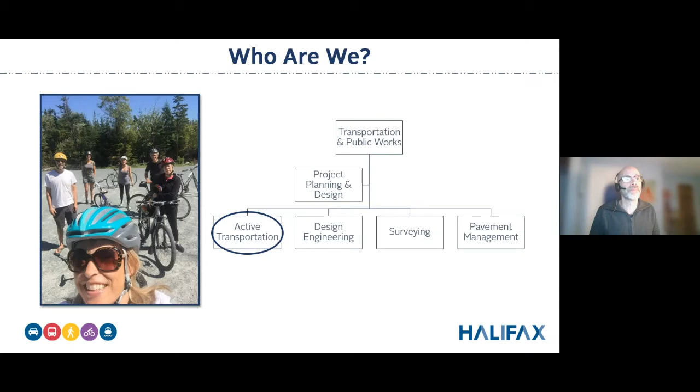This is a question we could do the whole presentation tonight on, why active transportation is important. I would say that if you look at our active transportation plan and the integrated mobility plan, the municipality is working in lots of different ways to make it easier, safer, and more comfortable for people to walk and bicycle.

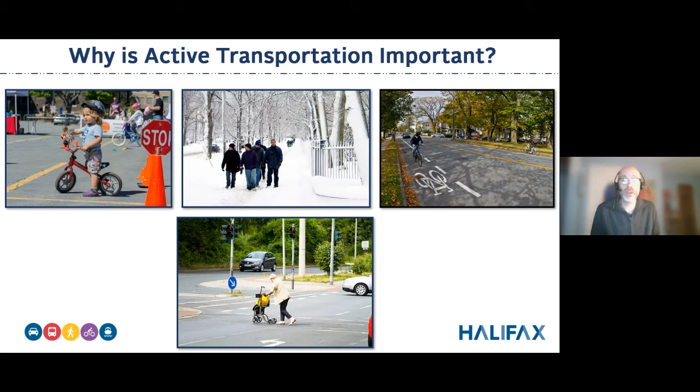That's connected to our objectives around accessibility, around providing transportation options that are accessible to a wide range of people. So if you choose or would like to walk, or you choose or prefer to bicycle, take transit, or drive, we are providing options that are as accessible, as reliable, and as safe, regardless of how you choose to get around. It's also connected to our objectives to reduce greenhouse gas emissions, and lots of different reasons.

I think if you look at how transportation has happened in North America, especially over the past say 40, 50, 60 years, you can't really argue with the fact that it's been focused on moving people in cars.

Halifax, like a lot of other municipalities, is now focusing on making it possible for people to choose options that are more sustainable, take up less space on the road, and are more accessible from an income perspective and from your physical abilities. So that's where we're heading. It's a transition, it's not happening overnight, but there's lots of different ways that we're making progress, and that's certainly the direction we're heading.

This presentation will be a little bit about some of the things we're doing for bicycling. This slide gives you a sense of where we've been and where lots of other cities have been in terms of bicycling infrastructure, and where we're going.

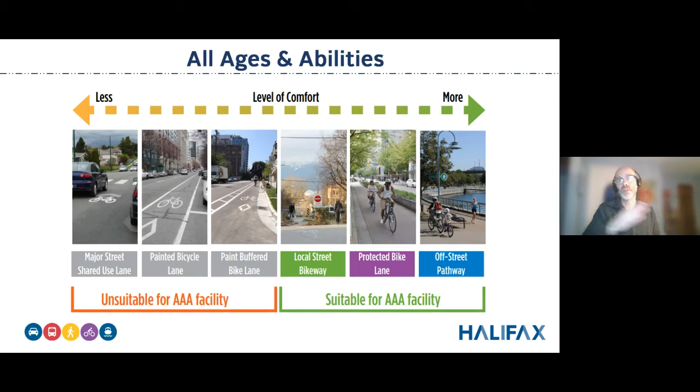Halifax and the IMP made a commitment for implementing all ages and abilities bicycling facilities. These are facilities that if you don't bicycle now regularly, you should feel safe inside of - you should feel buffered from motor vehicles, and there should be accommodation for better intersection treatments.

On the left you have things like pavement markings, which designate where bicycles should be, and maybe visual indicators to motorists to expect bikes there, but there's obviously no physical separation. So there's no room for error - it requires everybody to be watching what's happening on the road. What we know is that's not the kind of facility that if you're not comfortable cycling now, you're really encouraged to use. So less of that kind of thing.

Painted bike lanes - we still have lots of painted bike lanes, and we did build about 70 kilometers, I think, right now of painted bike lanes in the municipality. But again, that's a treatment that is no longer, on most roads, seen as the safest possible alternative.

So what we have now is kind of our three main facility types - I should credit the City of Vancouver with creating this graphic. Basically now our toolbox, the network that we're building, are local street bikeways, also called bicycle boulevards.

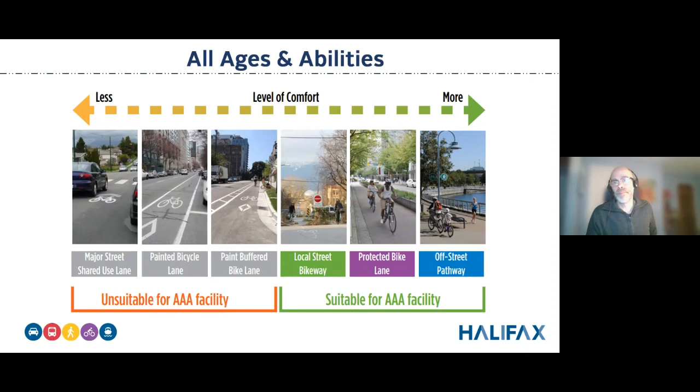Protected bike lanes - we have a lot of these in the works right now. Places like Hollis Street, South Park, a tactical protected bike lane on Lower Water, Rainie Drive. So those are the kind of facilities where we're getting separation. And then our multi-use pathway network, which is shared bicycle pedestrian traffic.

So here are some protected bike lanes that you're starting to see around. Can we go back? Thank you.

On the left are some of the more temporary facilities - we call these tactical protected bike lanes. These are typically put in for a period of about 1 to 3 years, where either we see an opportunity to get a more immediate safety benefit and improvement on the street, and they also are ways for us to experiment and try something and learn from it. So then when we go to build the permanent facility, it benefits from having something there in operation over a number of years to learn from.

In the middle, we have what we call an interim kind of facility where we work within the existing right of way. We don't have to dig up a lot of the street to put these in, and we place precast concrete curb to do this separation from the vehicles and the bicycle facility.

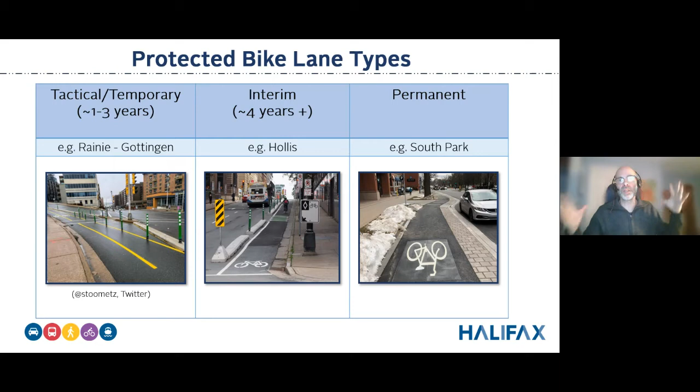So what you see on Hollis Street could be there for many years, or when Hollis Street comes up for a larger scale rehabilitation job in the future, you might see us pulling the curb over to where you see that precast concrete curb, and create a facility more like on the right there. That is a more permanent facility where the bike lane is up at the same level as the sidewalk, with more attention to streetscaping and integrating the bike lane into the overall facility.

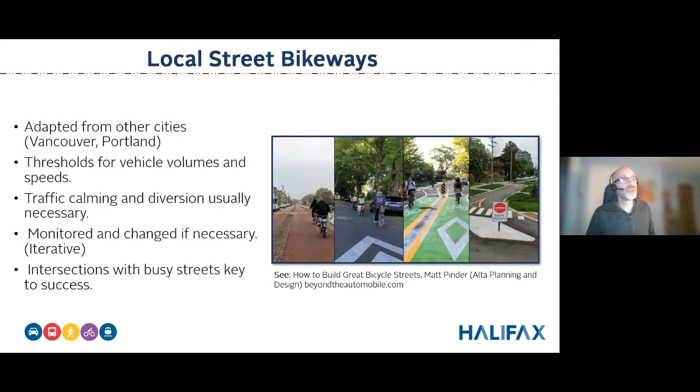So local street bikeways, this is a facility you're just starting to see in Halifax. We're adapting it from positive feedback in other jurisdictions. These are traffic calmed streets, and a key issue with these kinds of facilities is the intersections - local streets crossing major streets is something we've learned is a key design factor.

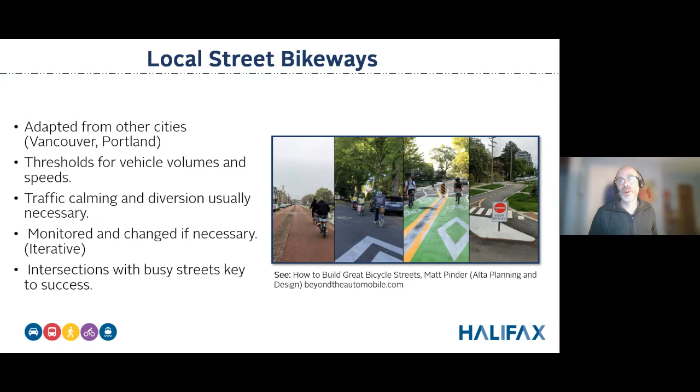The only other thing I'll say about these facilities is that as we implement them, we're learning and coming back to make adjustments to help meet the speed thresholds, because we want cars going about 30 kilometers an hour. And the volume - we want these streets to behave so that the cars on them are the cars of the people who live there, or maybe visiting. That helps set it up for a safer overall experience for people bicycling.

I think next slide, Chloe.

Something that's new, in a good way, is that we're finding some of these facilities are starting to get a little too crowded, and other places are finding the same. So thresholds and new guidance is coming to help us decide when we might need to separate bicycles and pedestrians. That's something we're starting to look at more than before.

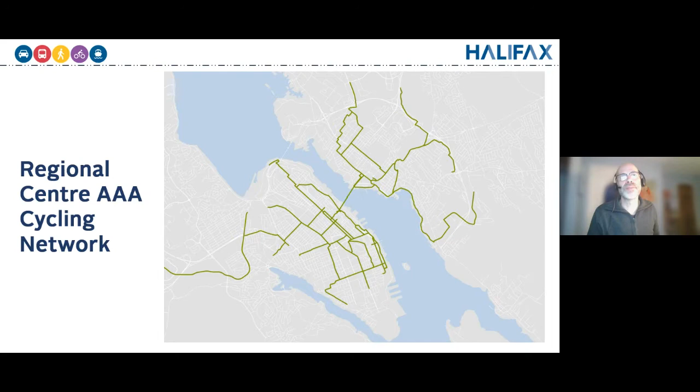We're kind of starting to see the segments are there, and some of the gaps are gradually getting filled in. You can see the total build out we anticipate in terms of the darker network. Maybe the next slide, Chloe.

So just a few slides - we were asked to focus in on, I think, 3 projects. The Macdonald Bridge Bikeway Connectors project came out of the Active Transportation Priorities Plan. We did lots of engagement and stakeholder engagement back in 2014, and one of the questions we asked is what are the priority projects. This one here was really, I think, the number one project priority that the public identified.

It really came out of the fact that if you're bicycling on the Macdonald Bridge, it's a fantastic place to be - you're protected, you've got a great view. Usually a great experience, I'd say, sometimes it's pretty windy. But on either end of it, it's really not great - in fact it's almost the furthest thing from all ages and abilities. Lots of people talk about the Halifax side, where you have to go under the bridge and then climb up into busy traffic. So really not a great environment, not the safest possible environment for people bicycling.

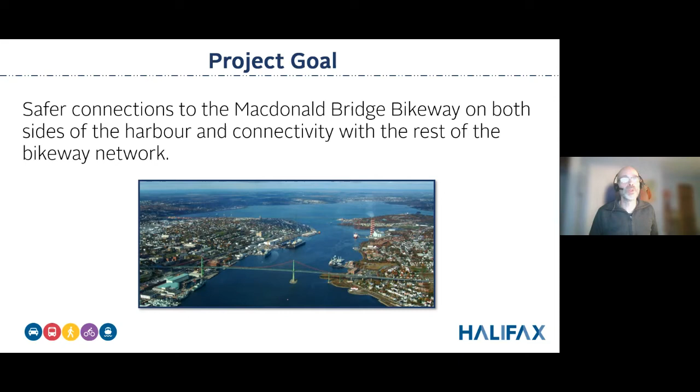And on the Dartmouth side, if you're riding a bike coming on or going off, you're in one of the busiest intersections in the municipality with really no accommodation for people bicycling. So the project looks at both sides. Lots of people like to talk about the flyover with this project, and that's an important part of it, but it's really just one part of the overall project. Next slide, I think.

So here's more or less where we are. In Dartmouth, we are almost ready to proceed to construction, and the key elements we should have are protected bike lanes on Wyse Road on either side, with protection looking more or less like what you see on Hollis Street and the part of South Park Street south of Spring Garden Road. Then a really important part is how it intersects with the bridge bikeway.

So there are lots of minor changes, actually reasonably significant changes, to that intersection, just to create space for the bike facility, some crossings, and other improvements. One thing that doesn't get highlighted enough with a lot of these bikeway projects is some of the pedestrian gains, the safety for pedestrians that happen as well.

One of the side benefits of this project is on the pedestrian side of the Macdonald Bridge, where, when you're on the Dartmouth side and go past the administration building, it's currently a really uncomfortable and not great — not a super technical term — place for a pedestrian. So we're going to make some changes there to make the crossings a lot shorter for pedestrians and make it a more logical arrangement, at the same time as we do the bikeway improvement.

Just to give you a sense, those red circled areas are the areas we're talking about. When you see it in relation to the overall Regional Centre AAA bikeway network, it's pretty clear it's right in the middle — connected to the Macdonald Bridge Bikeway — so it's a really critical part of the overall project to make it safer, more convenient, and more comfortable for people bicycling in the municipality.

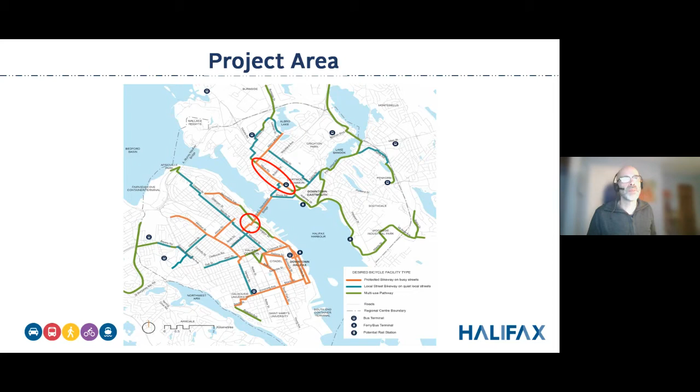It is probably, and I'll acknowledge this, the most expensive part of the work we're doing. However, we've gone through a lot of the options, and really the best and safest option, the most convenient for everybody involved, was the flyover option.

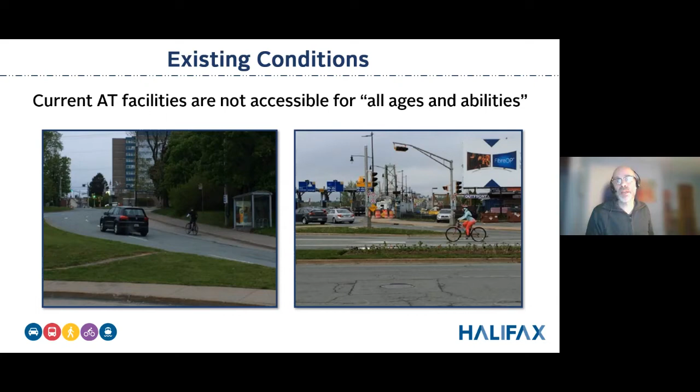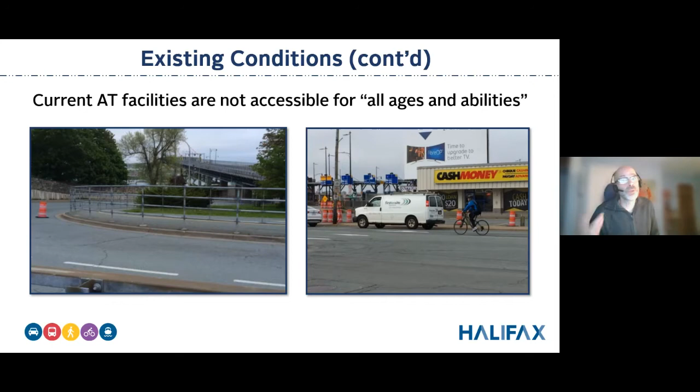The work we're doing with some researchers indicates that if you survey Halifax residents, there's a lot of people who would like to bicycle more, who see themselves bicycling more. The main impediment they see is the lack of protected infrastructure, and that's what we're trying to address.

Also, I should mention the current way you get on and off the Macdonald Bridge will stay, so there'll basically be two ways: you'll be able to access it from down below on Barrington, and also from the top on Gottingen. The plans we're working on right now will also offer a way for people bicycling on Brunswick Street to find a way up to the access point as well.

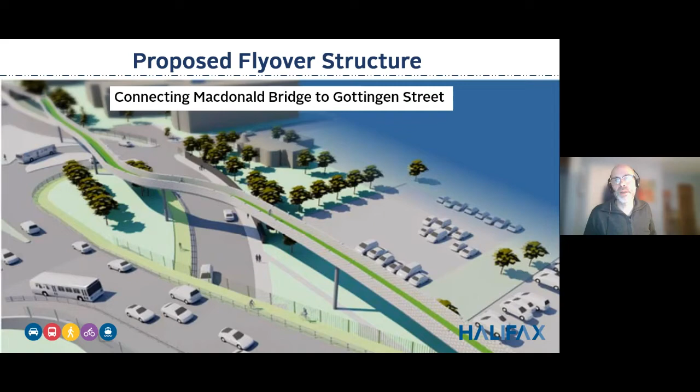That's just a little bit of what the intersection of North and Gottingen will look like. Again, we talk a lot about the flyover on this project, but a significant amount of the work will be on the north side of this intersection, to make sure that when you get off the flyover, you're connected to the rest of the developing all ages and abilities cycling network.

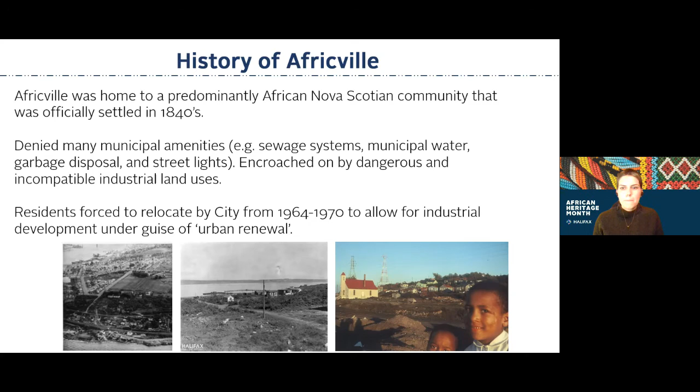Since then, former residents and activists have begun a very long protest against this treatment and the condemnation of their community. Moving closer to present day, in 1996 Africville was designated as a National Historic Site, commemorating its significance in Canadian human history.

It's really not a great environment for pedestrians. There are no facilities, and there are some sightline issues. I know even using those roads as a motorist it can be challenging.

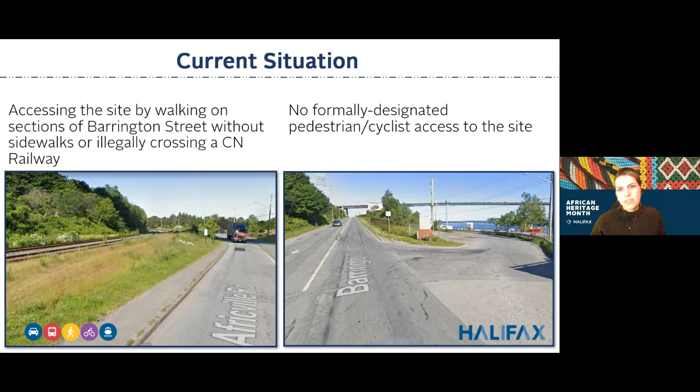So using it as a pedestrian can be very unsafe and uncomfortable. Alternatively, people are using some informal trails that come off the end of Novalea Drive and go through Africville Lookoff Park, on the south end of Barrington Street. But that involves illegally crossing a CN railway, shown on the left of the slide, to come out onto Africville Road. There is a portion of some type of paved path there, but it's not up to our sidewalk standards. You can see it's right up against the street where there's heavy truck traffic going down Africville Road, so again not very comfortable or safe for pedestrians.

So how did this project get initiated? One of the first components was community action. In 2016, a representative from the Africville Museum brought a petition to council to make Africville more accessible through sidewalks and public transit. When that petition was brought to council, there were about 600 signatures on it, and that petition continues to live on today. From what I've heard from the director of the Africville Museum, there are now over 2,000 signatures on it. So this is a much desired project.

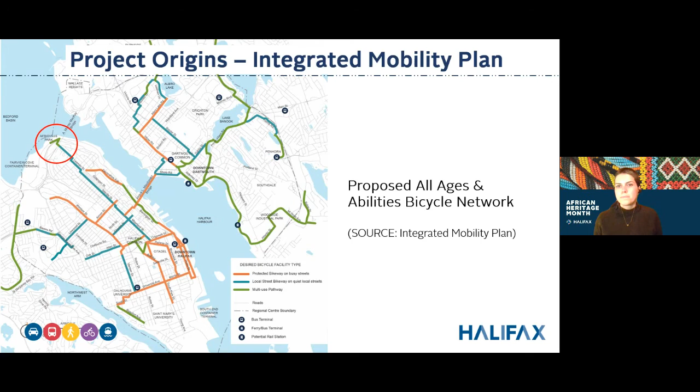This stage of the project includes identifying potential routes to make a connection from point A to point B, as well as evaluating those routes based on input from our colleagues, internal HRM departments, engagement with the public, engagement with key stakeholders, and all that information gathering. Through that evaluation, preferred route or routes are determined, and then there's the preparation of an actual functional design.

So a 30% drawing, getting all that information into a design that we can bring to council for approval. Then it gets officially taken off the active transportation planning team's plate into more of the engineering design stage. However, as the planners on the project, we do continue to advise on it and follow its progress into the eventual construction stage.

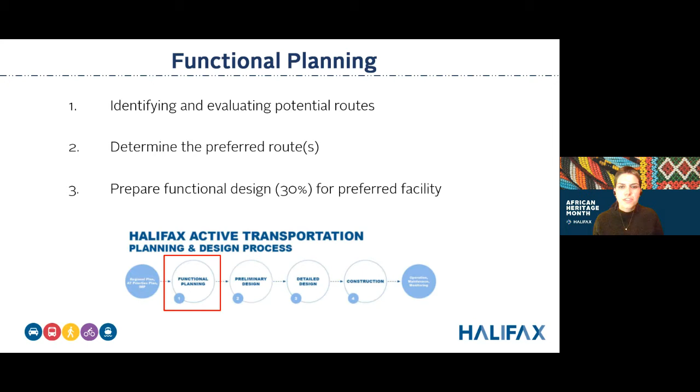These are the preliminary route options being considered at this point in the project. So number one, we have a multi-use pathway on Barrington Street, starting at Niobe Gate, where the Barrington Greenway currently ends, and going all the way out to Africville Road and the Africville Museum.

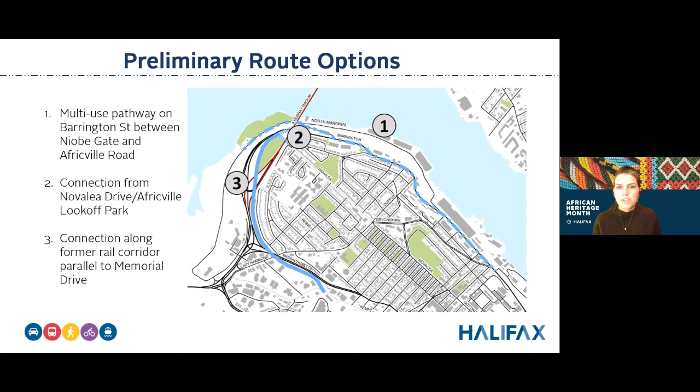Option number two is considering a connection from the end of Novalea Drive through those trails I mentioned in Africville Lookoff Park to the Africville Museum. And third, we have a connection along the former rail corridor parallel to Memorial Drive. These options are currently being discussed and reviewed internally for their suitability and feasibility.

So yeah, these AT projects are never easy. One of the big considerations for this project is building trust in the community. From understanding the history of Africville, you can probably understand that there's a feeling of distrust among Africville's former residents and descendants when it comes to planning projects with HRM. So a big part of this project is building good relationships in the community, to ensure we're able to do this project with voices of the Africville community being heard and reflected in the final design.

There's a lot of consideration around land ownership. Surrounding Africville Park, there are a variety of landowners that all have plans for the future of their property. We have CN Rail, Halifax Harbour Bridges, and Port Authority all around there. They really need to be kept in the loop on this project, as well as, in the future, we may need to be discussing land acquisition depending on what facility we end up moving forward with.

We have CN Rail going through the study area, which is just another challenge. We have to look at how we can potentially have a facility near the rail or potentially crossing over it. So there's safety to think about there, as well as having it actually approved by CN.

Then there are just some other existing conditions for the study area that are challenging. We're working with some steep grades. I mentioned there are some sight lines on Barrington Street and Africville Road that are a little bit sketchy right now that we'd have to consider. As well, there are heavy volumes of truck traffic, since we're surrounded by these industrial uses, and a lot of heavy trucks going through the area.

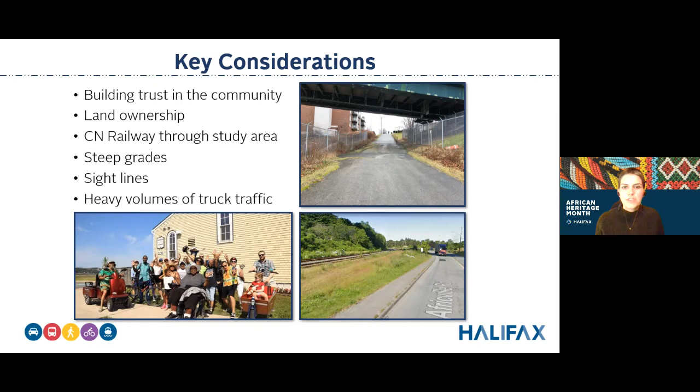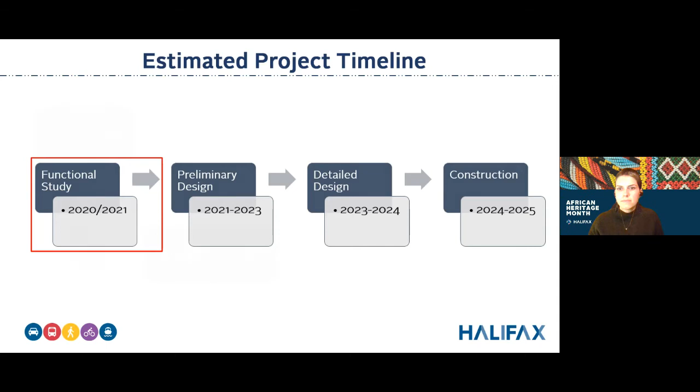So the project team, we're currently still in that route identification and evaluation stage, still gathering a lot of information to see what our best options are going to be. We're also coordinating with the Windsor Street Exchange redevelopment project team because these projects are in such close proximity to each other. We want to make sure that both our engagement processes as well as our future designs can work well together.

For next steps, we're going to be going out and re-engaging with some of the Africville community stakeholders, some of the community groups that are out there, to get their feedback on the work we've done so far. Then we're going to be rolling out with some public engagement. We want our engagement to really reach out to the Africville community specifically, as well as be able to go out to the greater community living along some of these potentially affected corridors.

Thank you so much. So I think we'll have questions if anyone has some.

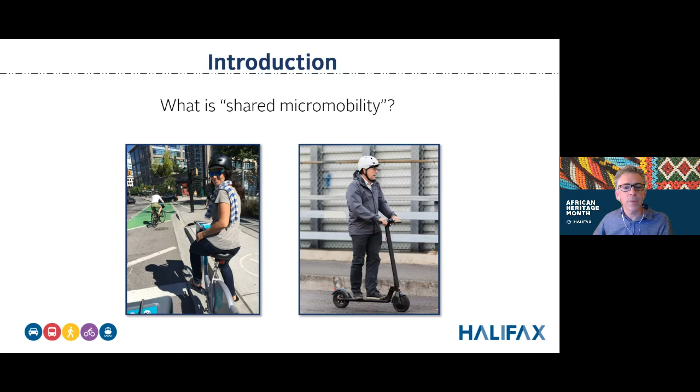As part of this project, in addition to looking at e-scooters, we've looked at the three dominant bike share technologies in the industry. These include dock-based equipment. These were the first types of bike share systems that we saw in cities worldwide, including modular docking stations and kiosks that are sometimes powered by solar power. The stations can be installed and moved relatively quickly as needed. But you have to go to a dock to sign out a bike, retrieve a bike, or return a bike.

Then came dockless smart bike equipment. These are bicycles that are typically locked to themselves, just using a ring lock on the back wheel. All of the technology, the GPS and the computer and everything, are on the individual bikes as opposed to the dock or kiosk. And these bikes generally can be parked anywhere within the service area.

And now there's also what's referred to as lock-to smart bike equipment, also referred to as hybrid systems. These are bicycles that can be parked within a service area, not necessarily at a dock, but they do have to be locked to some kind of fixed object, such as a bike rack, an existing bike rack, or perhaps a designated bike corral. Next slide, please.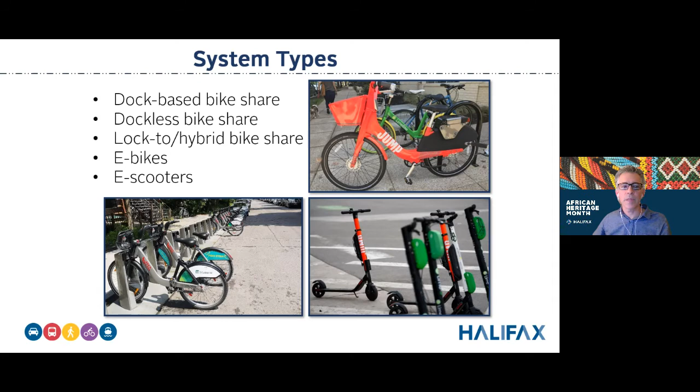Staff received direction to move forward with this study from both a 2019 Transportation Standing Committee motion and also Action 88 from the Integrated Mobility Plan. The TSC motion asked for an information report on third-party docked and dockless bike share and scooter share, really looking for a high-level analysis of the current status of legislation and regulations in HRM and what that would mean for a scooter share or bike share system operator.

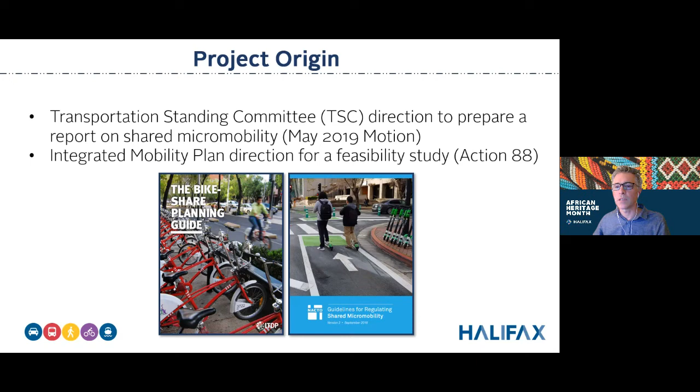That report is actually due, I think, to come forward to the TSC later at this month's meeting, so council will have an opportunity to have some discussion based on the information in that report. And then also Action 88 of the Integrated Mobility Plan directs us to complete a bicycle share feasibility study, which became the micro-mobility readiness study, so that we could better respond to the current state of the industry. So we expanded the scope from just bike share to also include other technologies. Next slide, please.

So we began our planning process in the fall of 2019 with stakeholder and public engagement. We've worked through the various phases of the project and completed the market analysis, the financial analysis, and we're actually now close to wrapping up the project, and we'll be reviewing a final report from the consultants over the next few weeks.

The project team includes our consultants from Alta Planning and Design, which is a firm based in the US, but with offices in Canada, and they have extensive experience with micromobility projects across North America. We've also been guided by a steering committee consisting of HRM staff from a variety of different municipal departments.

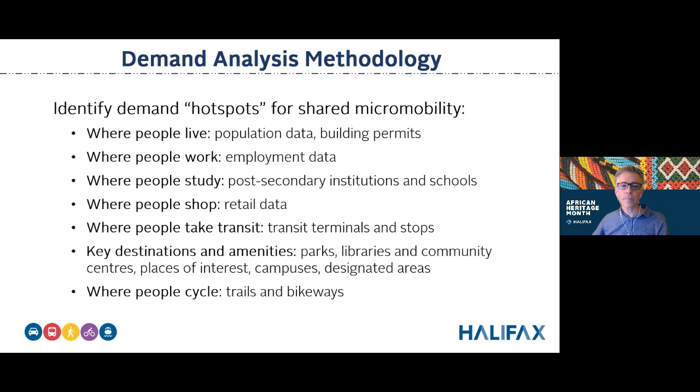We started originally using the urban transit service boundary as a boundary for this analysis, and then after mapping out areas of high equity concern, decided to expand that boundary to include communities outside of the urban core and regional center. From there we buffered out 2 kilometers beyond that to create our study area for this demand analysis.

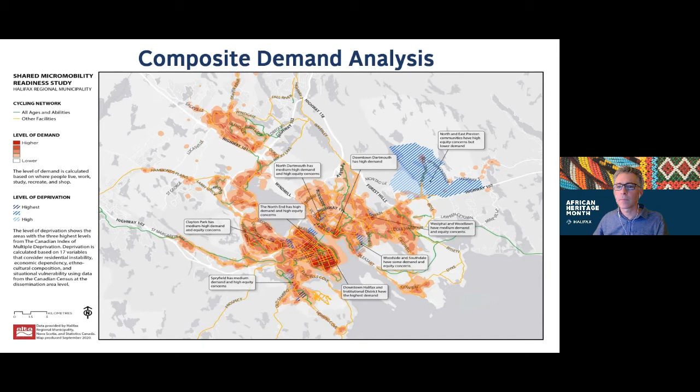Next slide, please. Obviously things are changing quickly in this industry, and the pandemic had a big impact on shared micromobility systems. Many of those systems had to figure out how to react and respond quickly to the health concerns related to the pandemic. Some had to shut down briefly, but overall I think they've been seen as a necessary service, and cities have found ways to continue to operate their systems safely.

Overall in the industry, we are seeing an increase in procured bike share systems. There was a period a few years ago where private operators were keen to come to cities and provide bike share systems basically at no cost to the city. But that business model hasn't really worked out the way they expected, and e-scooters have grabbed a big part of the business for private operators. They're much more interested now in operating e-scooters than bike share systems.

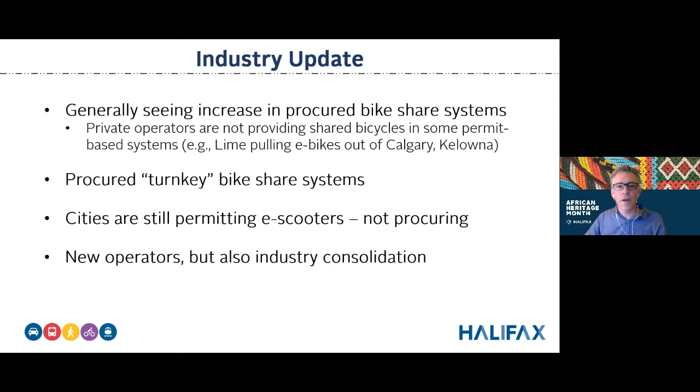And final slide, please. So our next steps to wrap this project up are to review our final report, gather some feedback on that from our steering committee, and likely later this year we will be going to regional council with possibly some recommendations on how we might proceed with a shared micromobility system in HRM, looking for direction and guidance from regional council. We haven't really had any discussions yet at the council level on what types of service we could or should be offering to HRM residents. So that's a discussion that still needs to happen at council, and we'll be looking for some guidance on that this year.

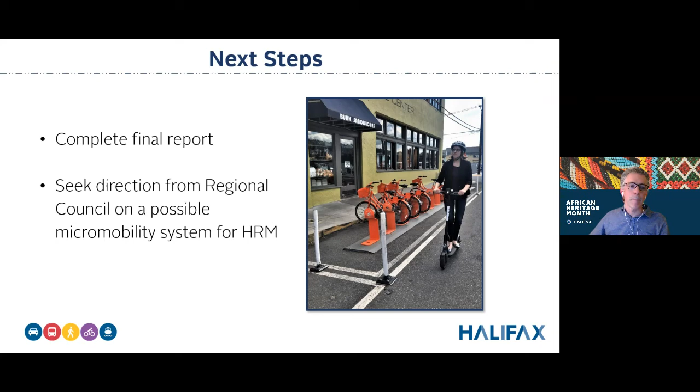Perfect, thank you Mark. So if you have any questions about Mark's shared micromobility presentation, type them into the Q&A chat on the side and we'll try and address them. So far we just have one. The question is: micromobility, seasonal or year-round?

Okay, seasonal or year-round? That's a good question. So our direction from the integrated mobility plan is to encourage year-round cycling as a transportation option.

Certainly, a bike share system can operate year-round, and in some cities they do. Bikes can be safely used in the winter if the infrastructure is there and the maintenance is there. That's what Winter Bike Week is all about, is promoting winter cycling.

E-scooters generally are not available during the winter months. In winter cities, they're removed from service and then brought back into service the following year, in the spring, summer, and fall. They're just not a safe vehicle to be operating in winter conditions. And I think there's probably many challenges from a technology perspective, in terms of battery life and durability of the equipment. So I think it's certainly possible for bike share, not so much for e-scooter share.